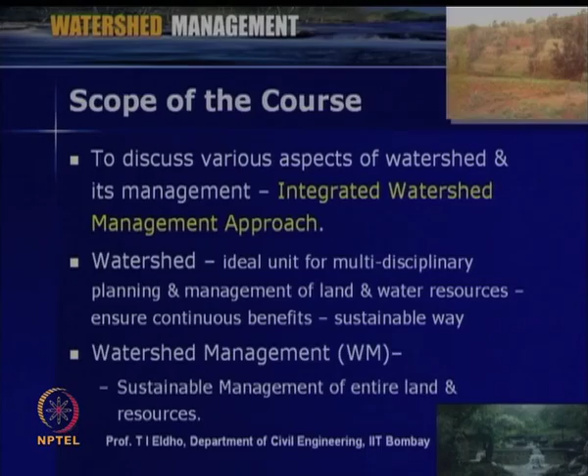A watershed is an ideal unit for multidisciplinary planning and management of land and water resources, so that the various management practices ensure continuous benefits in a sustainable way. This watershed is a geographical area which we can delineate as per the topography, and that is the basis of the various management practices of the water, land and other resources in that area.

When we talk about watershed management, we will be discussing it in the perspective of sustainable management. Sustainable management means all the resources available in the watershed will be managed in a way that they will be useful for the present generation and the future generation. Hence, it is the management of all the resources within the watershed.

Now coming to the course objectives. The various course objectives are listed here. To discuss various aspects of watershed development and management, that means the resources within the watershed, and its technological, social, ecological, environmental and sustainable management issues in a holistic way. That is the main objective of this course.

The main focus will be the various technical aspects of watershed management. The main emphasis will be on the perspectives on land and water management. We will be discussing the various complex issues within a watershed, analyzing the issues, and discussing the specific knowledge related to various issues of the watershed and its management in a holistic way.

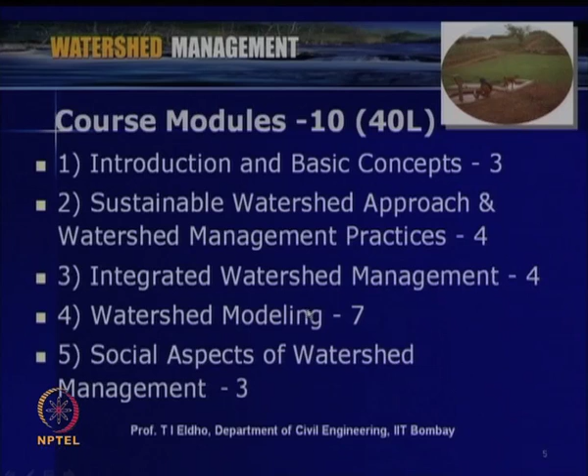The fifth module is on social aspects of watershed management, with about 3 lectures. In the sixth module, we will be discussing the use of modern techniques in watershed management: remote sensing techniques, geographic information systems, computer models, decision support systems, etc. This module will have 5 lectures.

The 7th module is on management of water quality, with 4 lectures. The 8th module is on storm water and flood management. In most watersheds, floods and droughts are major issues. So, flood management will be discussed in the 8th module, and in the 9th module we will discuss drought management within a watershed and various issues related to droughts and their management.

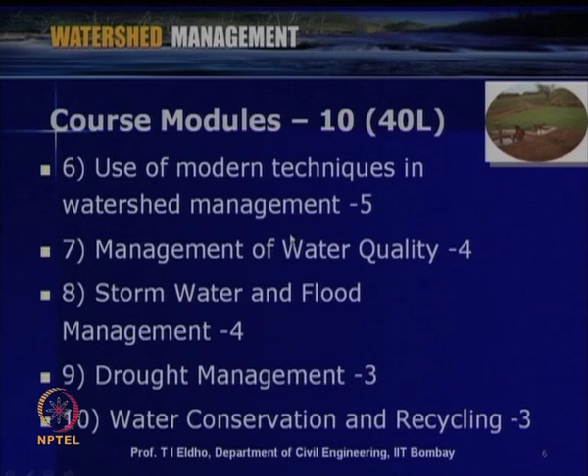In the last module we will be discussing water conservation and recycling, with about 3 lectures. In the preparation of this video lecture, a number of reference books, journal papers and various internet resources will be used.

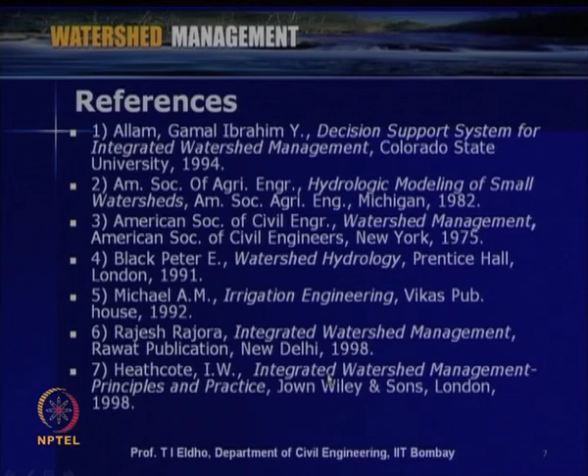Some of the important references are listed here, which include Decision Support System for Integrated Watershed Management by Allam Gamal Ibrahim, Hydrologic Modeling of Small Watersheds by the American Society of Agricultural Engineers, Watershed Management by the American Society of Civil Engineers, Watershed Hydrology by Black Peter, Irrigation Engineering by A. M. Michael, Integrated Watershed Management by Rajesh Rajora, Integrated Watershed Management by Heathcote, and Watershed Management by J.

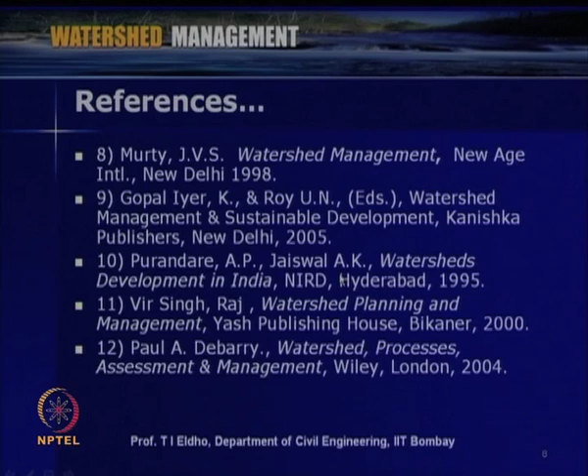V. S. Murty, Watershed Management and Sustainable Development by Gopal Iyer and Roy, Watershed Development in India by Purandare and Jaiswal, Watershed Planning and Management by Vir Singh Raj, and Watershed Processes, Assessment and Management by Paul A. Debarry. So, these are some of the important references which will be used in the preparation of these lectures, and some other references will be mentioned at appropriate places whenever we discuss some issues.

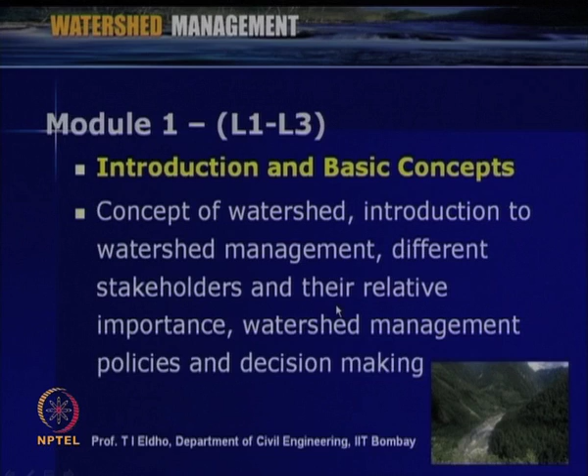So, today we will be starting the first module. The module is on introduction and basic concepts. In this first module there will be 3 lectures, and the contents will be the concept of watershed, introduction to watershed management, different stakeholders and their relative importance, watershed management policies and decision making. The first lecture we will be discussing today.

So, the first lecture is on introduction to watershed management. Today we will be discussing the following topics: the concept of watershed, watershed approach, common watershed problems, introduction to watershed management, watershed management necessity and principles, and a case study with respect to the topics we will be discussing today. Some of the important keywords for today's lecture include watershed management concepts, characteristics, deterioration, necessity and principles.

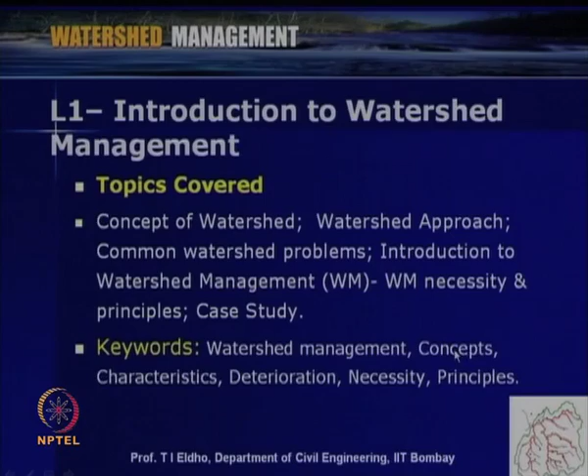So, first we will be discussing the concept of watershed. Watershed, as I mentioned, is a geographical area which is identified topographically, say, surrounded by ridges, and the water falling on that area will be draining to a single outlet as in a river or a lake. So, when we discuss the watershed in a holistic way, we have to discuss the various issues, what is happening with respect to the land, water and various resources within the watershed.

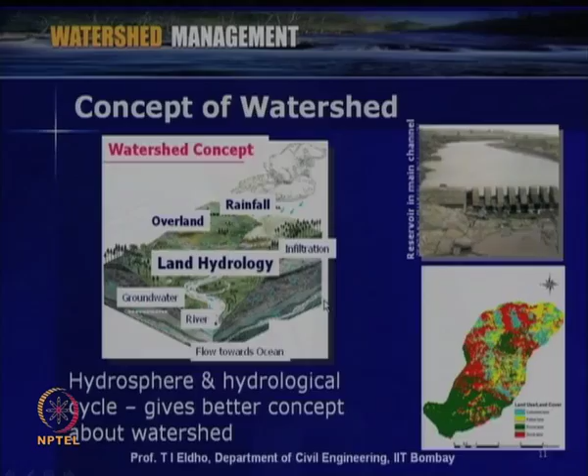As you can see, in this watershed various land use and land cover patterns are shown with various colors: agricultural land use, forest land use, shrub and various other kinds of land uses. So, when we discuss the watershed, we have to mainly see the various resources like land, water, mineral and other resources within the watershed. Water is an important aspect as far as a watershed is concerned, so we have to discuss watershed management mainly within the perspective of water.

So, we will be discussing the hydrosphere and hydrological cycle within the perspective of this watershed, which gives a better concept of the watershed. As defined here, the hydrosphere in physical geography describes the combined mass of waters found on, under and above the surface of the planet. The hydrosphere consists of waters of land, rivers and other water bodies, including the groundwater system, and also the oceans and the atmosphere surrounding the land.

So, when we discuss the water resources within a watershed, we have to see the surface water, groundwater and what is happening to the water resource within the watershed which we consider. That way we have to consider the hydrological cycle. Hydrological cycle means the change in phase of water in the hydrosphere. Due to precipitation, water is falling on the ground or the watershed which we consider. Initially we have the runoff as overland flow, then that will be joining the stream.

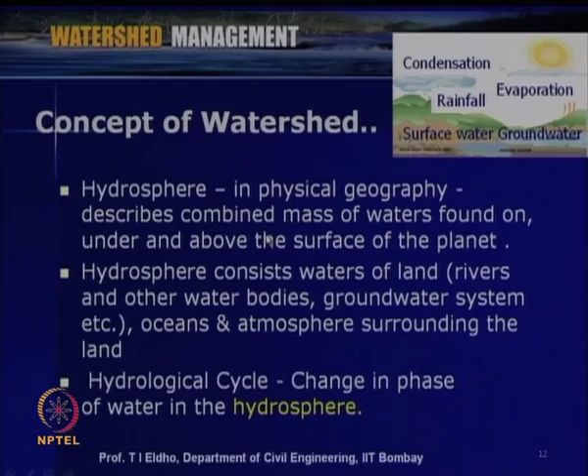So, when we discuss the management of the water within a watershed, we have to see the various phase changes happening within the watershed, like precipitation to runoff, and during that precipitation-runoff, various processes like interception, evaporation, infiltration, and finally runoff from the outlet of the watershed. So, the various issues related to water we will be considering in a holistic way within the watershed.

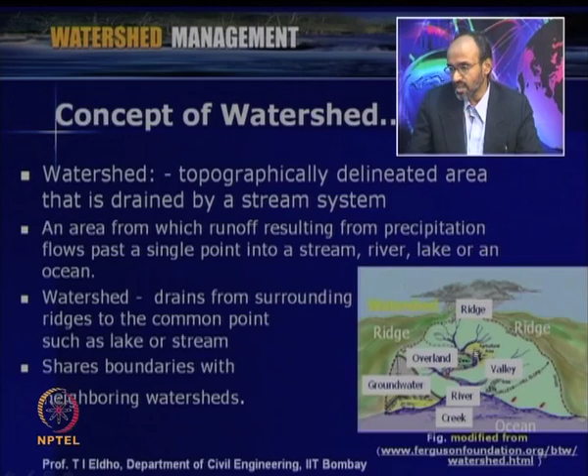So, coming back to the basic definition of the watershed. As I already mentioned, watershed is a topographically delineated area that is drained by a stream system. You can see a watershed is typically represented here in this figure. This is a ridge, here another ridge, and this is a major stream or river. Whatever precipitation falls on this watershed area is transformed to runoff, and finally that will be coming to the river, which we can consider as the outlet of this watershed.

So, this watershed is an area from which runoff resulting from precipitation flows past a single point into a stream, river, lake, or it can be to the ocean, as shown in this figure. The water falling on the watershed as precipitation, it can be rainfall or snowfall, drains from the surrounding ridges to common points such as a lake or stream.

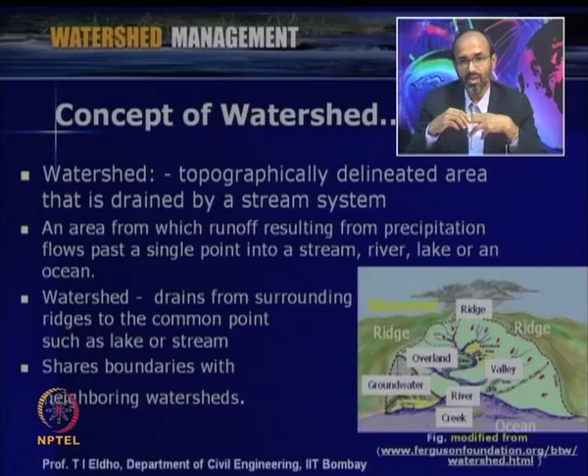So, when we consider the geographical area of the watershed, this area we are delineating as a watershed is of course bounded by other watersheds. This is the watershed we now consider, but on this side is another watershed, and this side another watershed. So, the watershed which we consider shares the boundaries with neighboring watersheds. We are separating the watershed as a scientific unit for the various resource managements. That is the basic concept of watershed management.

So, now before going to further details of the watershed and its management, we have to understand the basic characteristics of a watershed, since the watershed management practices depend upon the characteristics. So, we should have a fundamental understanding of them. Some of the important watershed characteristics I have listed here. First one is size of the watershed, second one is shape of the watershed.

Size means it can be a larger or smaller watershed depending upon the area which we consider. Shape means generally, naturally, it will be irregular. It can be a broader shape, an elongated shape or a narrow shape, so different shapes are possible. Then the third important watershed characteristic is the physiography, or the physical geography: how the land is changing, whether the watershed considered has hills, plain area or sloping area. So, the physiography is very important.

So, these are some of the important watershed characteristics which we have to consider before going for any watershed management practices. All these various characteristics we will be discussing in detail in various lectures. So, before going to other issues, let us initially look into the size of watershed. The other characteristics like shape, physiography and others we will be discussing in other lectures. So, today let us have a brief discussion on the size of the watershed.

So, when we go for watershed management practices, the size is important, whether it is a very large watershed or a small watershed. A watershed size can vary from a few square meters to thousands of square kilometers. As shown in this slide, there can be a major watershed of thousands of square kilometers, and then depending upon the drainage system, the orders of various streams, we can further consider this main watershed into sub watersheds. For example, this is the main watershed, then this is a sub watershed, which is a part of this watershed.

So, we can start the various management practices by considering a sub watershed also, and then depending upon the area of the watershed, we can further classify milli watershed, micro watershed or mini watershed, considering the area of a small watershed, very small watershed, like that for the given major watershed.

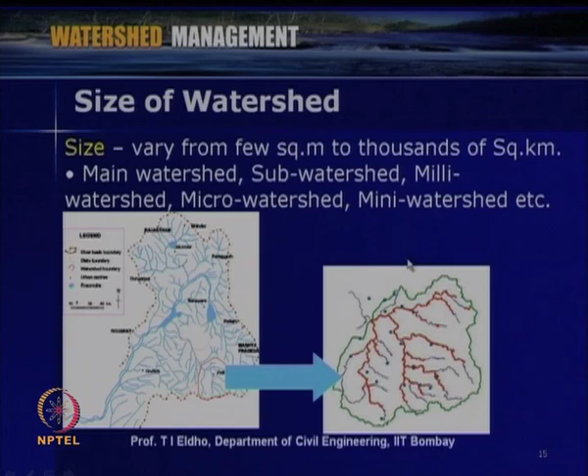So, as I mentioned, for the considered watershed, there will be other watersheds as boundaries. For example, if you consider this watershed, this is the ridge of this watershed, and this is the major stream, and other minor streams of different orders will be joining the major stream. So, this is the watershed which we consider, which is a sub watershed of the main watershed.

So, now what we have discussed is the concepts of watershed. We have seen that we have to consider the important watershed characteristics, which is very important before considering any management practices for the watershed which we consider. So, now we will discuss the watershed approach.

So, as we have seen, the watershed is a scientific area which is delineated based upon the topographical features of the area which we consider. So, the watershed area is very appropriate for planning, management, implementation and the further sustainable development of the area. So, the watershed approach is appropriate to solve various resources problems, whether the land, the water or various other resources which we consider, for planning, implementation and management.

So, as we discussed, on a watershed scale it is much easier to manage the land and water, so that we can manage the system in a sustainable way, in an environment friendly way, so that we can have better management financially as well as socially. So, when we discuss watershed management, the environmental issues are very important for the considered area.

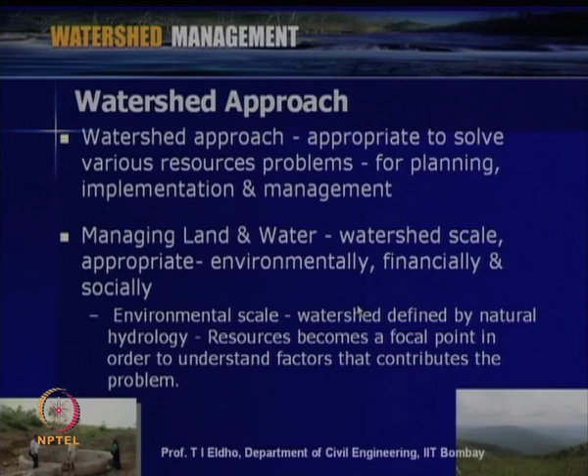So, when we consider watershed management on an environmental scale, the watershed is defined by natural hydrology as an ecosystem, and whatever resources are within the watershed become a focal point in order to understand the factors that contribute to the environmental or ecological problems of the watershed considered.

So, when we consider watershed management, it is the issue of sustainable development and management. So, we have to discuss various issues like financial issues and social issues, so that we have the optimal benefits for the area which we consider. So, the core of the watershed approach is a better understanding of various factors or resources within the considered watershed.

So, when we go for watershed management practices, we have to consider various issues. We may have to go for modeling of various systems within the watershed, then monitoring the system when we implement, and then reporting under a watershed framework.

So, we go in a scientific way as far as the watershed management is concerned, so that we can save time and we can utilize the available resources or available money in a better way, so that optimal management is achieved.

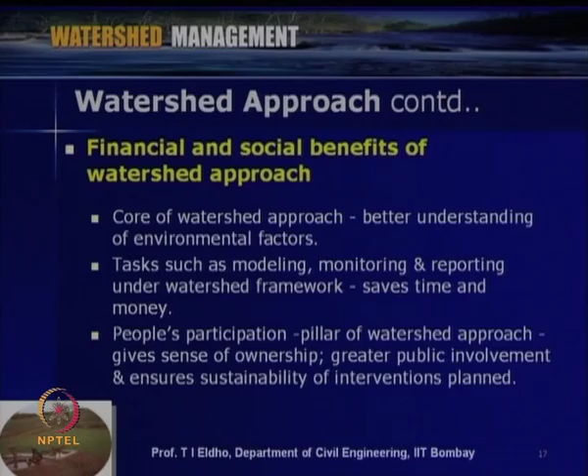So, when we consider the people participation, it gives a sense of ownership. So, greater public involvement will be there, and that ensures sustainability of the interventions which we plan within the watershed management perspective.

So, generally uncontrolled, unplanned and unscientific land use is a major issue as far as a watershed is concerned. So, for example, if we consider the agricultural land within the watershed, then if the various practices followed by farmers are not scientific, if they are not appropriate for the land or the watershed which we consider, then there will be problems or deterioration happens to the watershed.

Then watershed erosion: due to the various faulty land management practices, there can be soil erosion, and then the top fertile soil will be eroded away from the watershed. So, that will make the soil unfertile. Then some of the issues like shifting cultivation by the farmers. So, that also can be an issue as far as agricultural land is concerned.

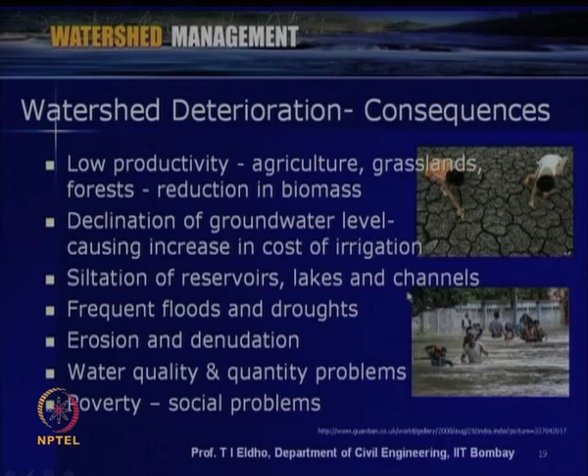Then as far as water is concerned, as we discussed, it is not only the quantity of water, quality is also a major issue. So, if the available water is not of good quality for various uses, then it will be another issue. So, all these finally can lead to poverty in the area which we consider, and that also can lead to further social issues for the considered watershed. So, these are some of the important consequences of watershed deterioration.

So, based upon this analysis of watershed deterioration and its consequences, let us look into typical watershed related problems. So, the problems can be physical problems of the area which we consider, such as steep slope, bad lands, soil erosion, etc., which we have already discussed. Then a typical watershed problem can be resource use problems like agricultural practices happening within the watershed, then forest management. So, agriculture practices like shifting cultivation, then forest fire, then deforestation, etc. So, these are some of the resource related issues.

The end problems. So, finally, all this leads to reduced yield, then there can be flooding in the rainfall or monsoon season, then there can be droughts in the summer season. So, these are some of the end problems as far as typical watershed problems are concerned. Then all this finally leads to socio-economic problems for the people residing in that watershed. So, if there is no sufficient yield from agriculture, then there are no sufficient jobs and sufficient money for the people, then that can finally lead to poverty, and people may migrate to other areas. So, as far as socio-economic issues are concerned, mainly poverty, migration and other related issues.

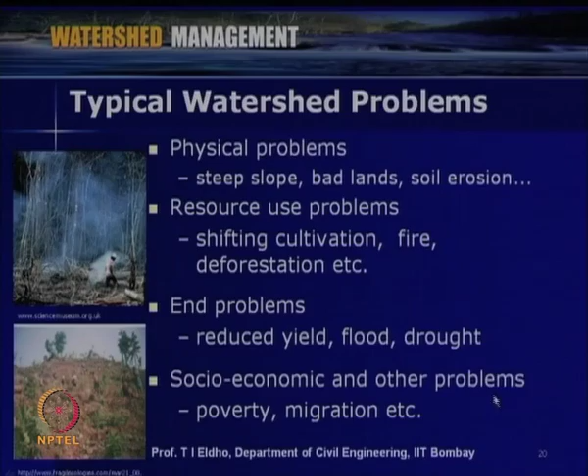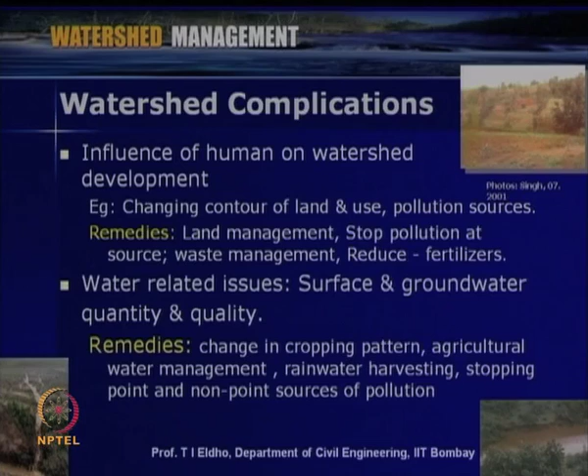So, that is based upon the land which we consider, and then the water within the land which we consider. Then for stability of land use in lower areas. So, you can see that when we consider the topography of the watershed, there can be upper land, middle land and lower land. So, whatever you are practicing within the upper or middle land can affect the land use or its management within the lower land. So, we have to see the stability of land use in lower land within the perspective of what is happening within the upper land.

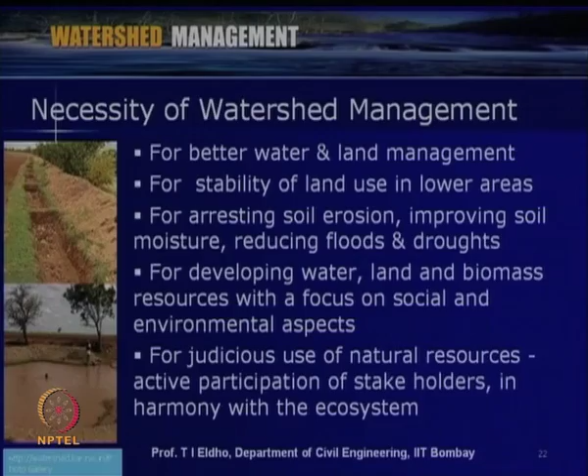So, now we will look into what are the important principles of watershed management. Some of the important principles are listed here. In watershed management, we consider the utilization of the land according to the capability of the land, then maintain adequate vegetative cover for control of soil erosion. So, we have seen soil erosion is a major problem. Then we look into the conservation of rainwater at places where it falls. This can be like contour farming as shown in this figure.

Then draining out of excess water with a safe velocity, so that we can avoid soil erosion, and store it at appropriate locations, like in a pond, so that we can use the water for future use. Then preventing erosion, so that we are stopping the water at different locations. So, recharge to the groundwater system will be improved, and we will have better management or better availability of groundwater for the watershed which we consider.

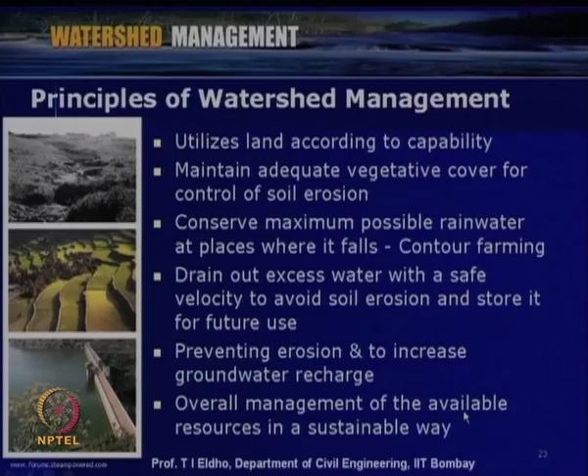And finally, overall management of the available resources in a sustainable way. This is the most important principle of watershed management: various resources like land, water, the forest, the minerals, all the resources available within the watershed, in a sustainable way. So, these are some of the important principles of watershed management.

So, in this lecture we have seen the concept of watershed, then the watershed approach, the various issues which we consider for a sustainable and environmentally friendly development. Then we have seen the watershed related problems like watershed deterioration, and the consequences of watershed deterioration. Then we have seen the necessity of watershed management practices, and the important principles of watershed management. As I mentioned, we are looking at the management of various resources within a watershed in a holistic way, so that we achieve sustainable development for the watershed which we consider.

So, within this perspective, we will now discuss a small case study of how sustainable, environmentally friendly watershed management is possible. Here we are considering a case study of Upper Lake watershed management. This case study is taken from a paper by Nandi, titled Management of Upper Lake Watershed. This watershed is in Bhopal, Madhya Pradesh, India. It is called Upper Lake.

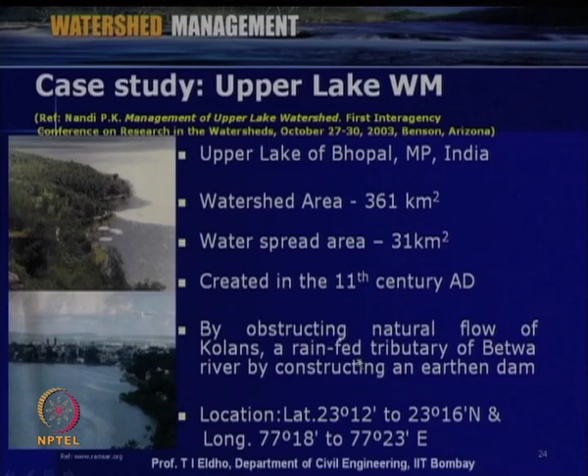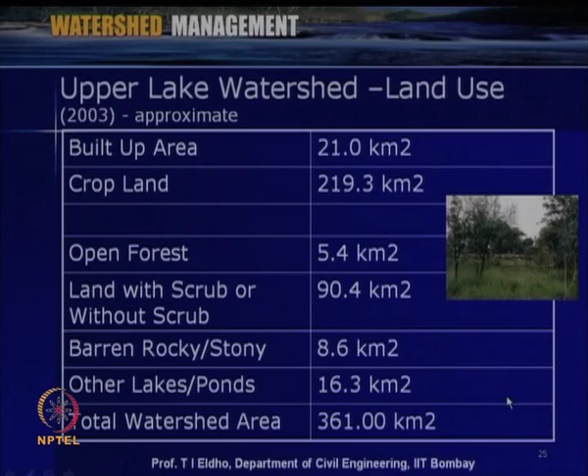As we discussed, the size of the watershed is important. As I mentioned, this is a sub watershed of the so called Upper Lake, and the area is about 361 square kilometers. The next issue is the land use of the watershed. The various land uses for this watershed are listed here: built up area, crop land, open forest land, land with or without scrub, barren or rocky or stony land, and other small lakes and ponds. The areas are also listed here. The total area of the watershed considered is 361 square kilometers.

So, when we look into the watershed management for the area which we consider, we have to consider the watershed management in a holistic way. So, first one is the land, then the water in the land, and then of course, various resources within the watershed. So, anyway, in this case study the main issue was the water related issue.

So, some of the important information as far as this watershed case study is concerned. This lake which we consider in this watershed is the lifeline for various farmers and fishermen. About 500 families are there in this watershed. The principal source of potable water for the city of Bhopal is from this lake, for about 1.5 million people.

So, before implementing some of the important watershed management practices which we will be briefly discussing in this case study, the various issues in this watershed were the polluted lake, the major lake, and then the total agriculture practices were not scientific, then the land was not properly managed. So, some of the important environmental concerns or the important watershed related problems for this area are listed here. So, deterioration of water quality. So, water available in the lake was not good.

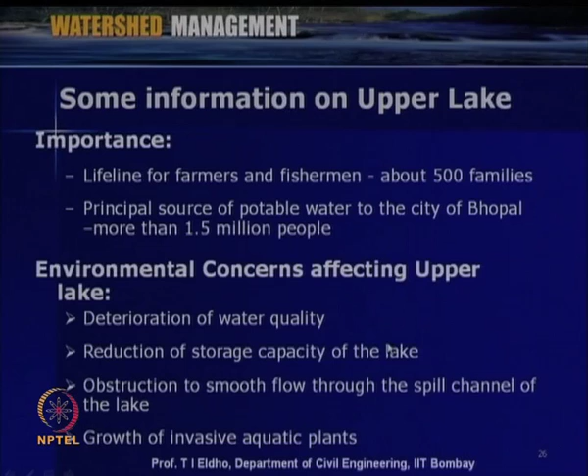Then reduction of storage capacity of the lake, the issues like weed growth, and then polluted water were some of the major issues. Then obstruction to smooth flow through the spill channel of the lake. So, the drainage system for the watershed was not proper. Then growth of invasive aquatic plants was there for this watershed. So, that you can see here. So, these were some of the important issues before implementing these watershed practices for this upper lake area.

So, due to the various problems for this upper lake area, a scientific study was carried out in the 1990s, and then the Ministry of Environment and Forest, Government of India, and state governments put some plans for this watershed area in the late 1990s, and then they designated an area called Bhoj wetland along with the lower lake area downstream of the upper lake, and the initiation of this project was by the Ministry of Environment and Forest and the state government authorities.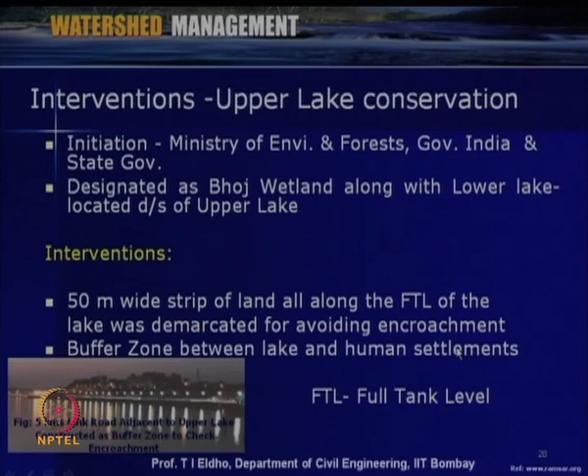So, some of the interventions within the watershed perspective, water related issues, are mentioned here. So, this includes a 50-meter wide strip of land all along the full tank level of the main lake. This was demarcated for avoiding encroachment. Then a buffer zone has been created between the lake and the human settlements within that watershed. So, these were some of the important interventions in this watershed.

Also, intensive plantations were implemented in this buffer zone. So, about 73 check dams across 28 inlet channels were implemented in this watershed. So, all these were done at the end of the 1990s, and the effect of these interventions was studied in 2003 by Nandi in this paper.

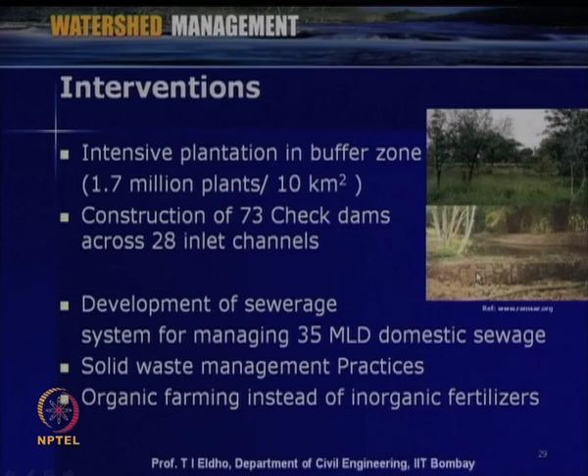And also, as we discussed, some of the other issues were the pollution problems. So, development of an appropriate sewage system was done for this area, so that pollution management has been done. Also, appropriate solid waste management practices were carried out for this area, and also organic farming instead of inorganic fertilizers was implemented in this area.

Another important aspect of this case study is stakeholder participation. So, due to the concentrated efforts of various officials and NGOs in this area, well coordinated awareness programs were carried out. Then the reforestation of the watershed area through participation of farmers, local people, schools, colleges, and city administrations was carried out in this area, and then organic farming was also promoted among the farmers.

So, when this case study was analyzed in 2003, some of the results of implementations as reported are listed here, after 5 years of implementation of various interventions. So, results of implementations are reduced sedimentation due to construction of silt traps and plantations, then improvement in general ambience of the area due to the buffer zoning.

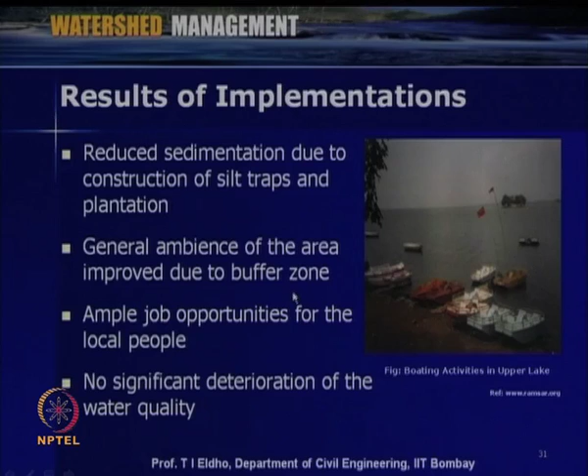Then some of the important lessons from this case study are listed here. Like the necessity of an integrated watershed approach. As I mentioned, for this case study, the management of the land, then water, then the various issues for the people, all these are considered in this study. Then importance of conservation practices, like the necessity of a buffer zone. That has improved very much for the lake which is considered in this area.

Then overall environmental management, the necessity of a legal framework to control anthropogenic activities. This lake was destroyed due to the various human activities within the watershed. So, a legal framework has also been established by the various government bodies during the implementation of this watershed scheme. The necessity of long term management plans. This program was implemented not on a short term basis, but a long term basis.

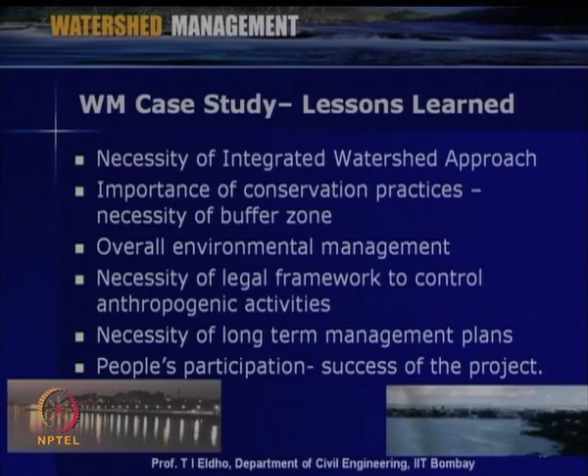And another important aspect which I want to emphasize here is people participation. The farmers, the schools, colleges, the various government organizations, all the people came together and participated for the overall management of this upper lake area. That was actually the success of this project, as we have seen the effects of these watershed management practices done in upper lake. So, with this, the basic concepts of this first lecture, introduction to watershed management, are over.

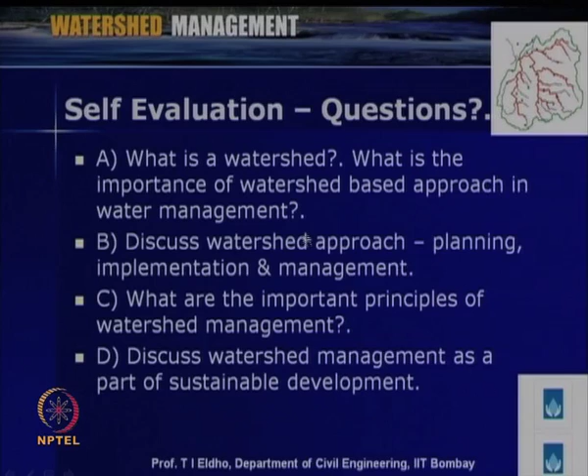Then the last question is: with the help of a case study, show the importance of people participation in watershed management. We have already seen one case. Similarly, other cases can be analyzed.

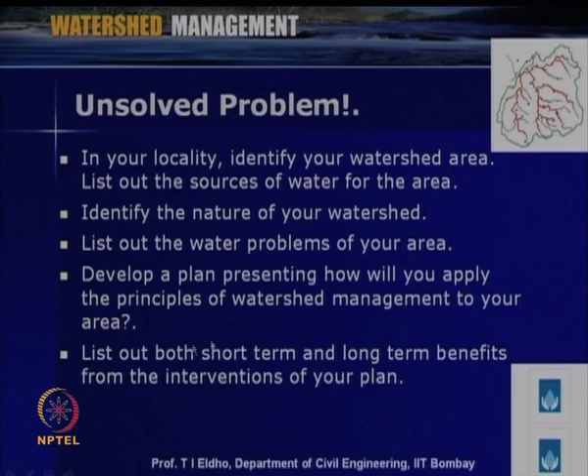As a last slide, one unsolved problem is put here for the listeners who are going through these lectures. In your locality, identify your watershed area, list out the sources of water for the area, identify the nature of your watershed, list out the water problems for your area, then develop a plan presenting how you will apply the principles of watershed management to your area, then list out both the short term and long term benefits from the interventions of the watershed management plan. Within the perspective of the various issues we have discussed, you can prepare this for the watershed you consider.

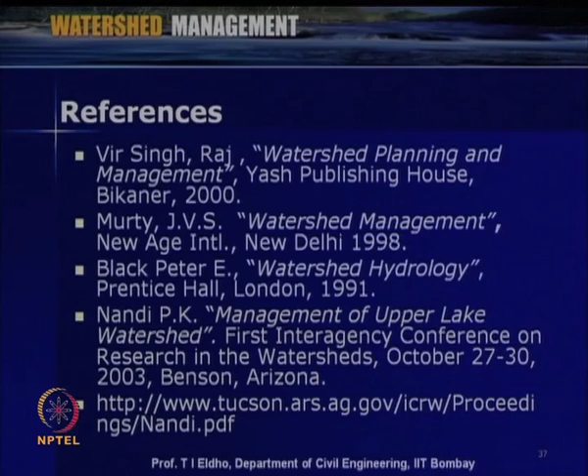Some of the important references used specifically for this lecture are listed here. So, in this introductory lecture, we have seen the basic concepts of watershed, the necessity of watershed management, the principles of watershed management, and also a case study related to various issues of watershed management.